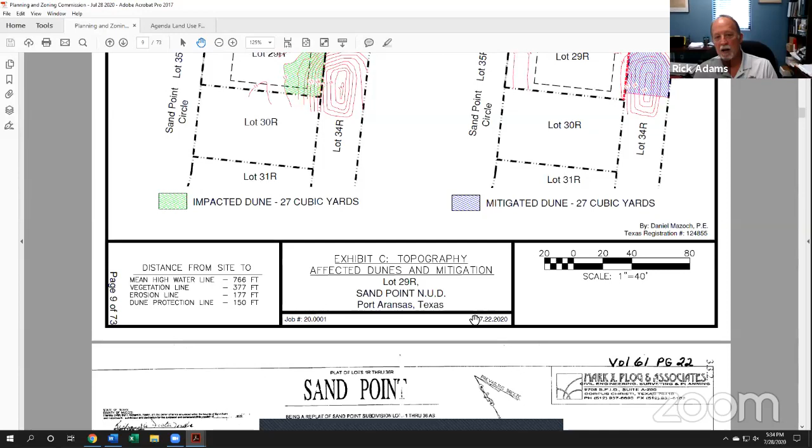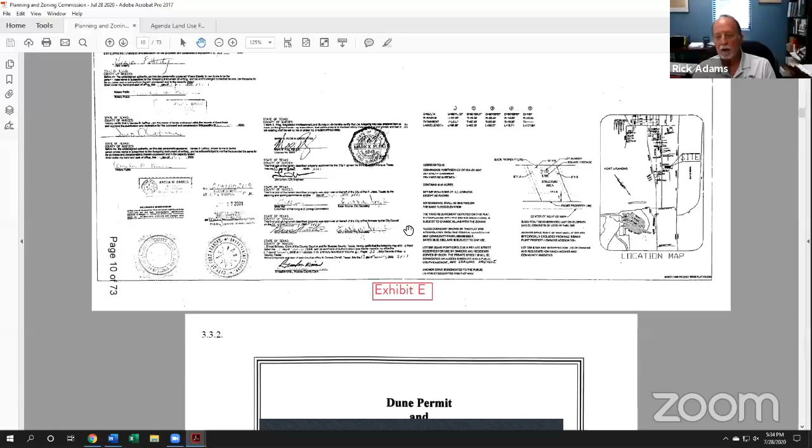Hey, Daniel. So if you guys will look at the exhibits, this property actually is kind of the gateway into the Beach Lodge project, probably a good reference point. At the end of Sand Point Circle, in that corner of the cul-de-sac, it isn't a lot that well... Daniel, correct me if I'm wrong, but it doesn't look like the lot, for whatever reason, was ever pre-flattened, or regardless, certainly acquired a topography that would be consistent with critical dunes.

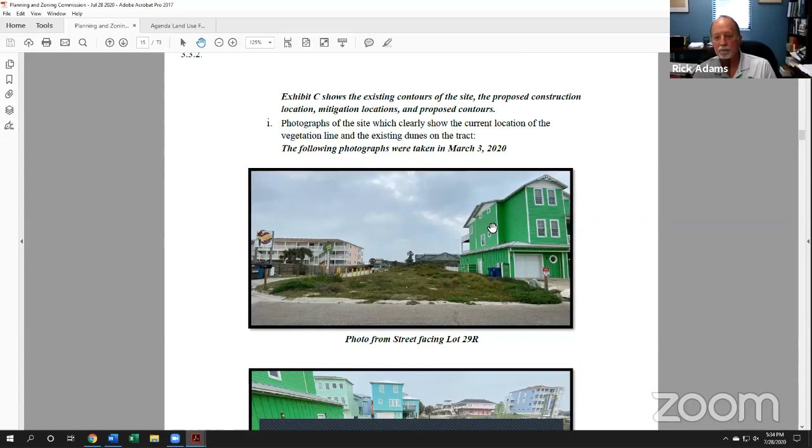It's vegetated, so I'm not sure how it had ever escaped preparation like a lot of the other Sandpoint lots, but obviously the pictures Nicole has up there show that quite properly. There's no question a dune permit would be required, and that's what you see there. So again, it's pretty straightforward. However, the limits of construction are there.

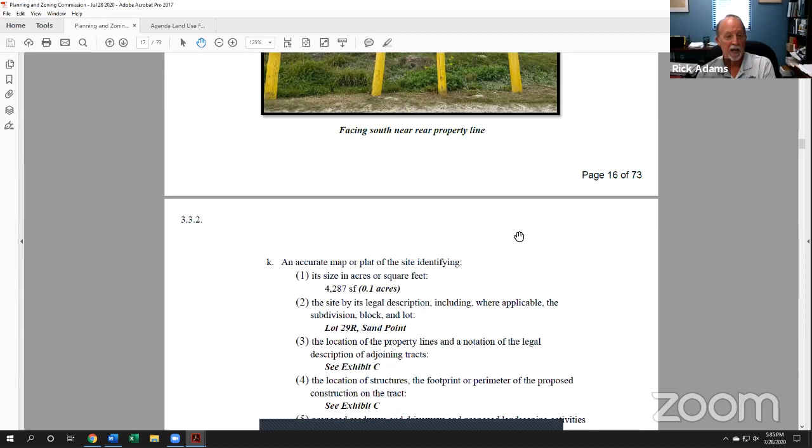The measurements on the exhibit show the impacted dune. I think it's 27 cubic yards, mitigated dune area, 27 cubic yards, 1-to-1, is pretty well laid out. Again, with that said, there's nothing other than the construction of a single family residence and the amenities in discussion here, and the exhibits do show the limits of which that construction will take place. So with that, staff's opinion is it's consistent with our coastal management plan. Therefore, we recommend approval.

Daniel, did you have anything you wanted to add? Not specifically. It's pretty much a run-of-the-mill kind of dune permit. A lot of these communities haven't handled dune permitting on a kind of global basis. This is a permit where my dad had done some plans for this client. In fact, he had done them for a previous owner, who was also a doctor, and then sold it to another doctor friend of his who's now looking at building a home on the property. He realized after the fact the dune permitting process, so I offered to help him get through that process by preparing this permit on the lot. This is one of these single-lot uses where we're trying to mitigate that volume.

What's slightly different about this from a typical permit is that a portion of the mitigation is proposed to be off-site. I talked to, and I forgot her name right now, the manager of the Sandpoint Owners Association, and she indicated that they'll approve the mitigation to be located on that common lot located behind the property, but she first wanted council's approval before presenting that to the board. Then they would grant permission to do that mitigation on the homeowners association lot located behind this lot. That's why that approval isn't included with this package, but it can be and will be provided after it's received.

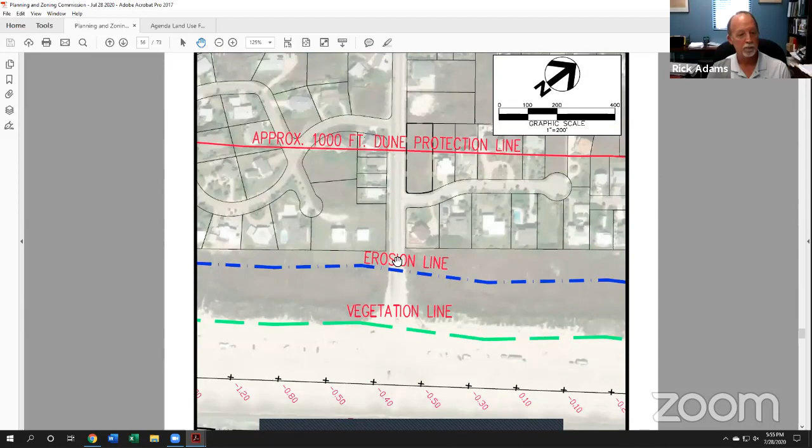Sure. I think most everybody's familiar with the Ocean View subdivision. Again, this is another lot, much like the Sandpoint lot, that currently has, although in a subdivision, never had any dune permitting done when the subdivision was first developed. So this is a fairly native lot, for lack of a better term. It does have critical dunes, hence the dune permit. As the application explains, it's to mitigate and compensate the site to build a single family residence in that subdivision. Attachment number 4 is probably the most representative exhibit, showing the affected critical dunes and where the mitigation site is. Not a significant amount by our dune permit standards, but enough that it does require the dune permit. So again, another one that's pretty straightforward. I think they did a pretty good job - if you notice the layout of the house, they positioned it as best they could to minimize that impact. I think that's why you see impacts a little less than you'd expect for a house this size in a dune protection area.

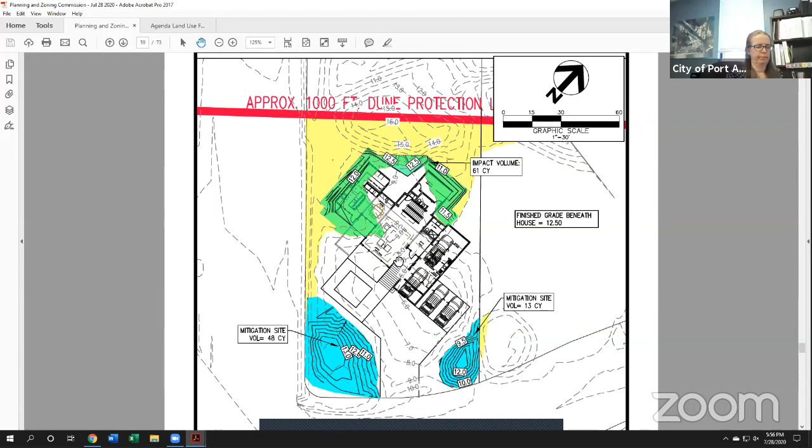So with all that said, it is consistent with the coastal management plan. The reviewing engineer agreed, staff recommends approval. And we do have William Walz, who's the applicant engineer, on the line. Hi.

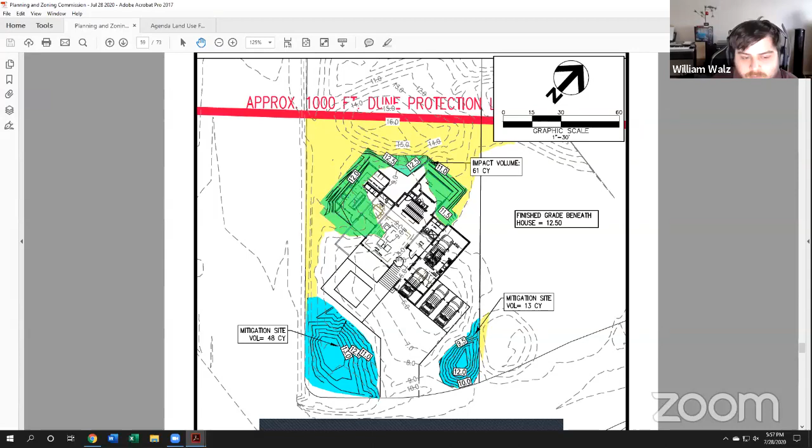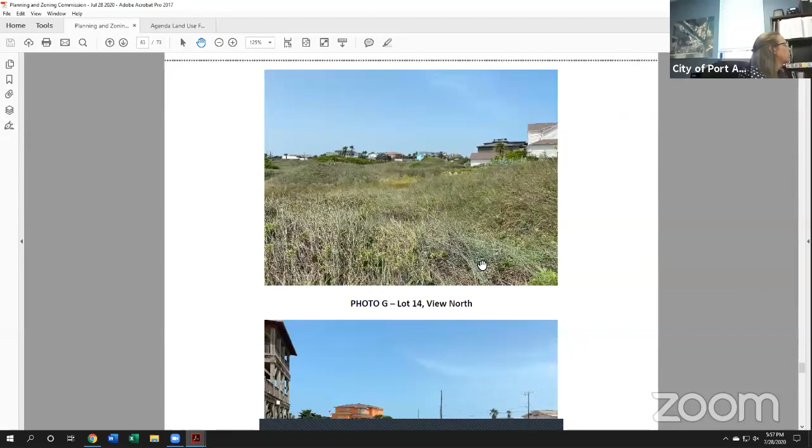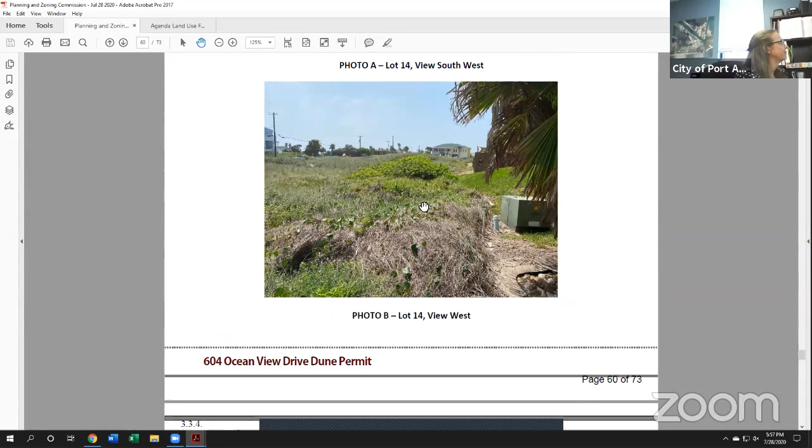Okay, for any discussions or questions? I do have one question actually. It looks like they are going to be doing the mitigation right there at the corner of Ocean View Estates and Avenue G, and they're going to be raising that corner by 3.5, 4 feet. Is there any concern for blocking sight distance for traffic? Actually, good question. If I'm looking at the topography - Will, jump in - it looks like they're actually... I'll let Will address that question. Yeah, so they're raising that up a little bit, but they have a couple feet out there where that retaining wall is. On that side there isn't going to be traffic obstruction or obstruction of view for traffic, because we're keeping... you didn't get a picture that has the retaining wall, do you? I think there should be some down below. Not really of the retaining wall. Yeah, I don't think there's going to be an issue there with that amount of fill. Yeah, you can kind of see how it's already sticking up there. Yeah, and it's not going to be higher than any of that vegetation there. This is the best corner. Yeah. Yeah, I have no issues.

Well, assuming no further discussion, I'll make a motion to approve dune permit BFDP 20-1698 and say it's consistent with the city's coastal management plan. Second. Was that second? Nick? Okay. All right, Frank Morgan? Yes. Garrett Kipke? Yes. Nick Lorette? Yes. Chad Schmides? Yes. Clark Smith? Yes. Robert Tips? Yes. Motion carried. Thank you.

Moving on, we are on item 3.5: discuss and take action on Flex 20-1646. Applicant is proposing to build approximately 183 workforce housing dwelling units. Applicant is requesting a slight increase in the density allowance and a slight reduction in the parking requirement, and will restrict the use to long-term occupancy in perpetuity. Applicant is the Port Aransas Public Facilities Corporation. Property location is 2700 Highway 361. Thank you, Mr. Chairman. So the Public Facilities Corporation is the city's nonprofit entity created for projects like this, becoming the public side of a public-private partnership. This is our long-awaited workforce housing apartment project whose genesis was really kind of post-Harvey.

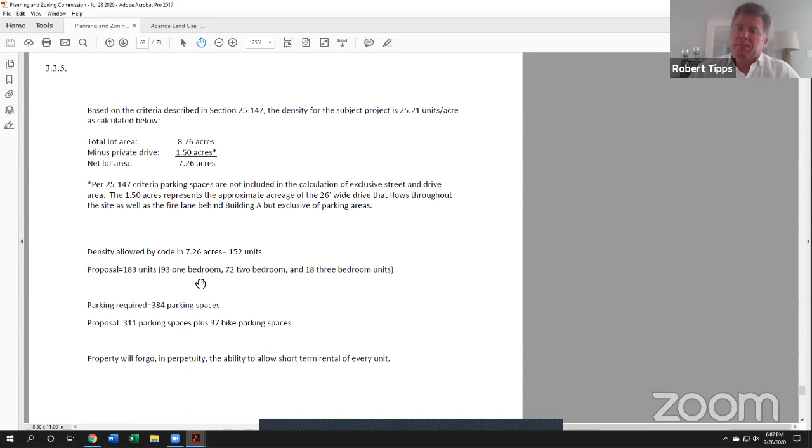Well, we have a motion on the floor. Do I have a second? I'll second. Nick? Okay, all right.

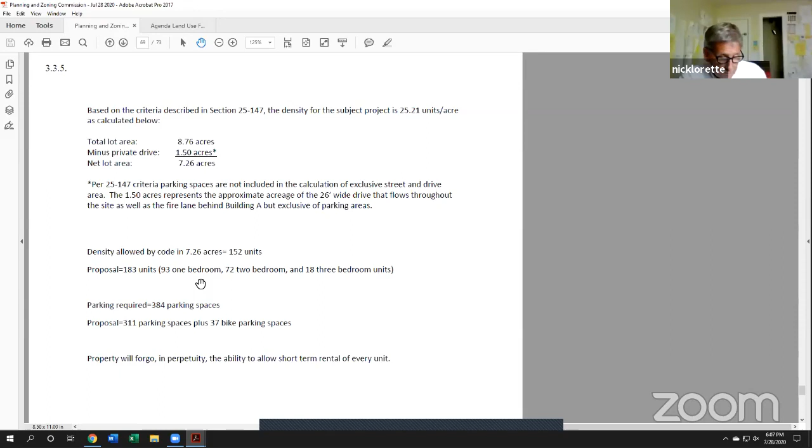Frank Morgan, yes. Garrett Kipke, no. Nick Lorette, yes. Chad Schmides, yes. Clark Smith, yes. And Robert Tipps, yes. Motion carries.

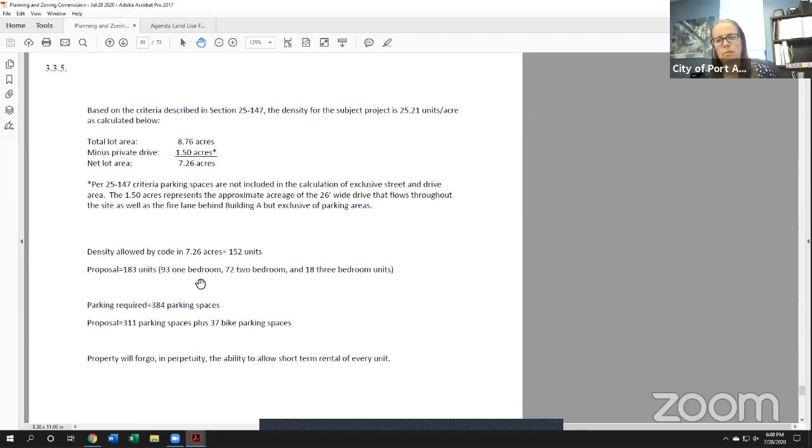Okay, we are done with items for consideration. We'll move on to number 4, Planning and Zoning Commission comments and items for future consideration.

Yeah, Frank, I'm gonna go. Pardon me? What'd you say, you're going to go? Just so you know, I said I'm not afraid of getting as much training as we can. The law firm conducting it is one of the probably preeminent municipal law firms, and they do a significant amount of training in Texas. So they are a first-class educator in these matters. They're definitely experts in planning, zoning, platting, and a lot of those things.

But the part that caught us was an in-depth coverage of zoning boards of adjustment. So that's not you guys specifically, but when they had that, the target audience was P and Z members, so we just felt it was incumbent upon us to mention it. We've got a budget to pay for anybody that's interested in doing it. Nicole will forward this to you guys. You're welcome to go to the link and look at it and see if it's of any interest.